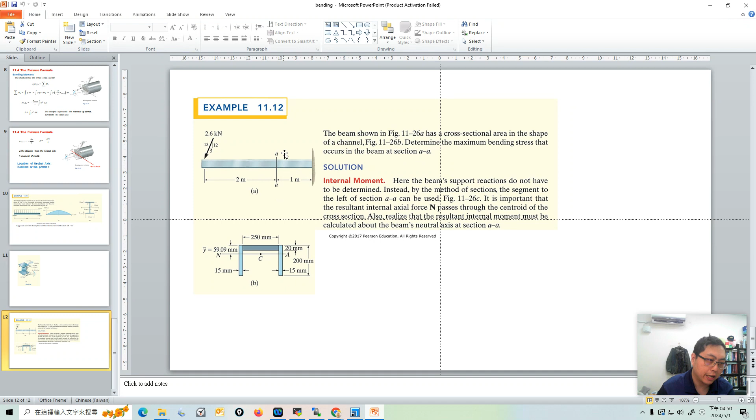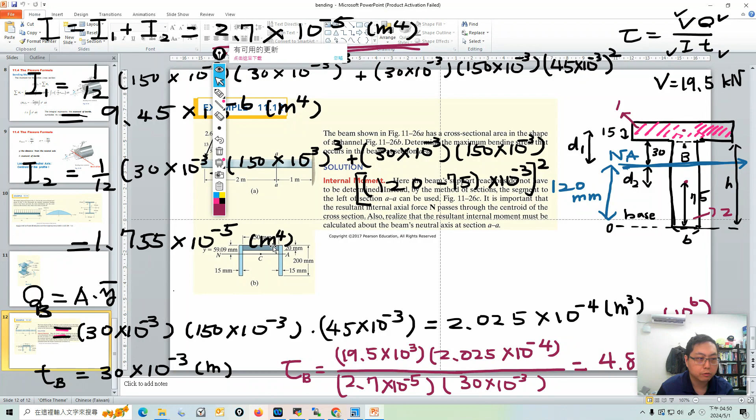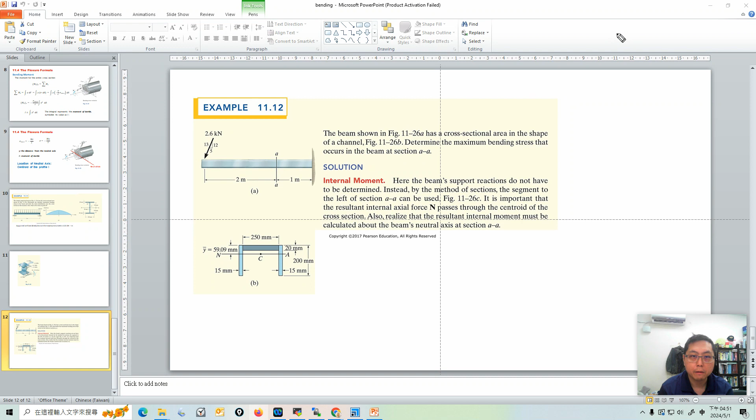When it comes to calculating bending stress in a beam, do you remember the formula? Let me write this for you. The bending stress in beam, as shown in a previous slide, is minus My over I. M is the moment, y is the distance between the point of interest and the neutral axis, and I is the moment of inertia of the cross section area.

So he says you want to determine the maximum bending stress that occurs in the beam at section AA. First, you want to determine the moment of this cross section AA, and to determine the max bending stress, you need y max.

You need the y max, and you have to understand that the max distance is on the surface. This is a beam, so there's a cross section area. The y max is maybe the top or the bottom, since it's the distance between the point of interest and the neutral axis — either above or below the neutral axis.

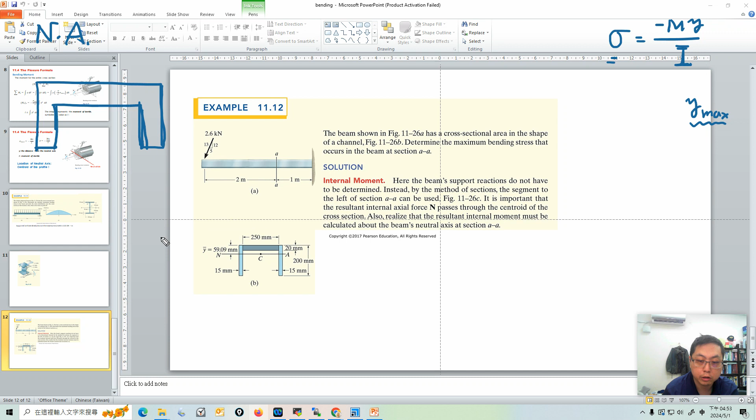Let's draw the shape of this cross section area. How do we determine the neutral axis? It's very similar to calculating the centroid of a composite area. Let's say this is ground zero — we set this as ground zero. He gives us the dimensions of the cross section area, and it's symmetrical.

He says here is 15, and here is 250 — unit is millimeter, be careful. And here is 20, and it's symmetrical left and right. So where is the neutral axis?

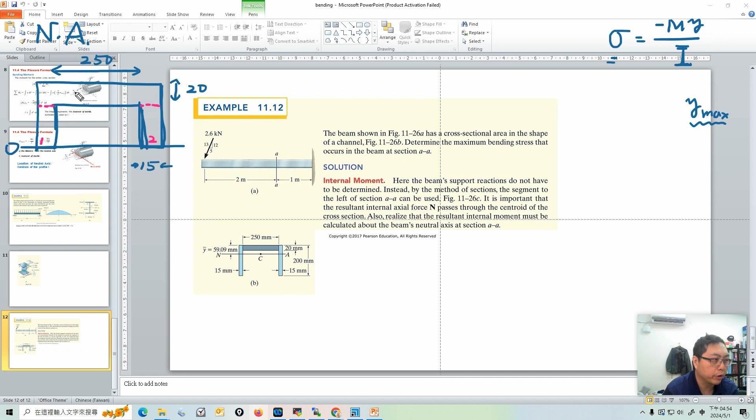For this problem, instead of the given cutting, I want to choose another cutting fashion — I'll cut it this way, giving me area one, area two, and area three. When dealing with a composite area, you divide the complicated shape into simple shapes, then determine the centroid of each area — the centroid might be here, here, and here.

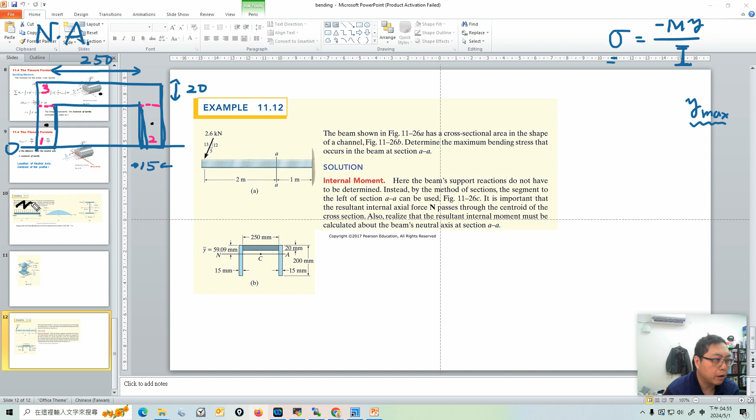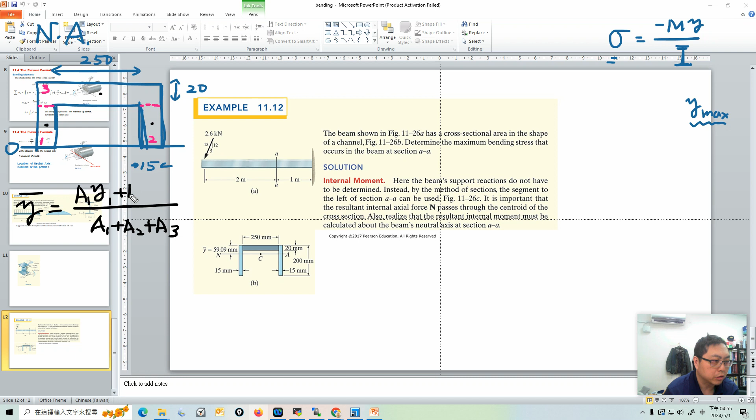So let's calculate. What is A1, A2, and the y bar? In this problem we have three areas: A1, A2, A3. So the y bar equals A1·Y1 plus A2·Y2 plus A3·Y3, divided by the total area.

So what's our A1 and A2? Okay, A1 and A2 actually are the same. So A1, okay, here is 15 millimeter.

And times the height here. Oh, I missed one piece of information. The total height here is 200 millimeter. So the height of area one is 200 minus 20, so it's 180. Hopefully you can understand. So it's 180 millimeter. Okay, so that's area one, area two.

So you multiply these two. So what's your answer? 15 times 180, that's 2,700 times 10 to the power minus 6, and its area, so it's m square.

Okay, the next one is, where is A3? Where should I put A3? Okay, I put A3 here. A3 here is 20 millimeter, times this here is 250, he is 15, so it's totally 280.

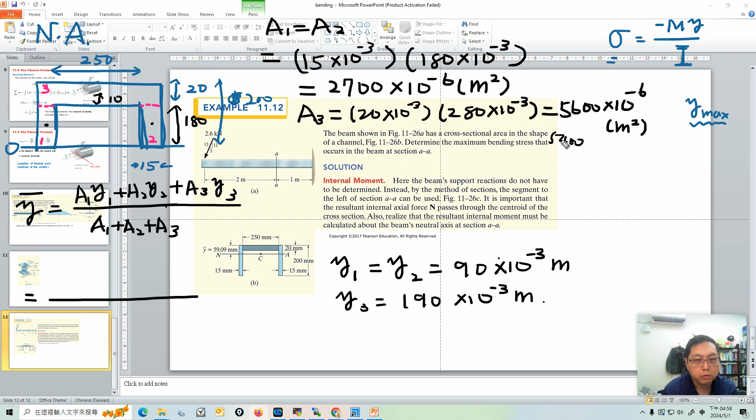So with this information we add together. So A1 plus A2 plus A3. So you will see it's 5400 plus 5600. So what's the number? It's 11000 times 10 to the power minus 6.

Okay, so that's our denominator. So our numerator is, A1 is 2700 times 10 to the minus 6, and times this is 90 times 10 to the power minus 3. It's really taking a very long equation. A2 times Y2. I don't have any space here, so where should I put a number?

Maybe I write it here. Okay, A1 is 2700, A1 y1, plus A2 y2, and the final one is A3 y3 is 190 times 10 to the power minus 3.

So and then we add them together, so it's okay. We deal with 10 to the power minus 9. Okay, let's add this together. 2700 times 90, so 2700 times 90 times 2, and plus it's 5600 times 190.

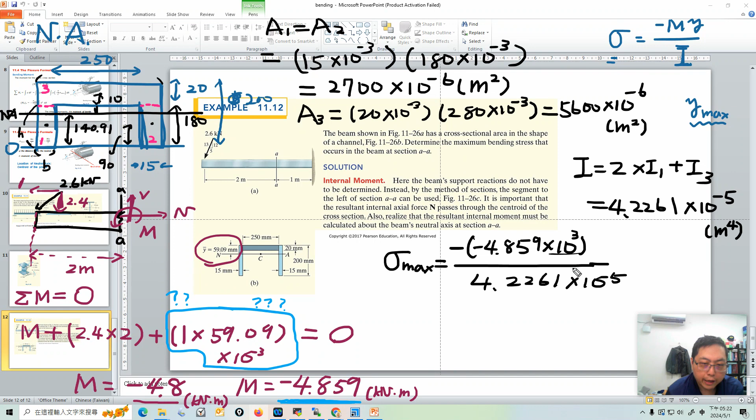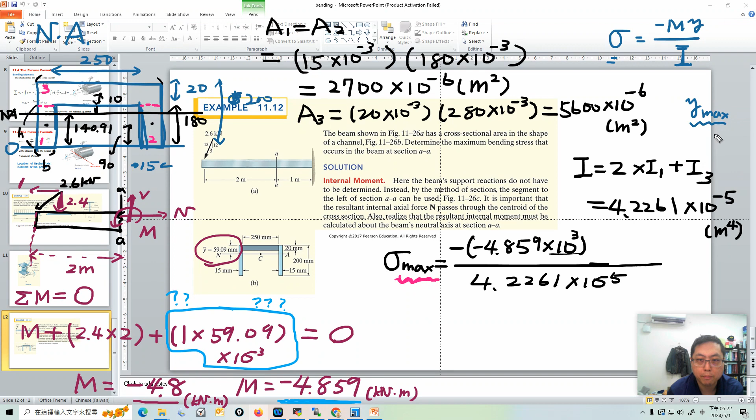Okay, the next one is y. If we want to have the maximum value, the only thing we have left is, can we find the maximum of y? What's the y maximum?

As I say, the maximum only has two choices: one is the top of the cross section area, and the other is the bottom of the cross section area. If it's the top, what's the distance of the top surface to the neutral axis? So right here is that, it's...

59.09 millimeter for the top surface. Your y bar at the top is 59.09 millimeter, because here is 50 millimeter, right? 59.09 millimeter. And we have another choice: what about the bottom? Bottom is here, it's 140.91 millimeter.

If we want the maximum bending stress, it looks like, because this has a greater value and it's below the neutral axis, we have to times minus 140.91 times 10 to the power minus 3. Why is it negative? Because it's below the neutral axis, and this has a greater value than y top, so this value will give you the maximum bending stress.